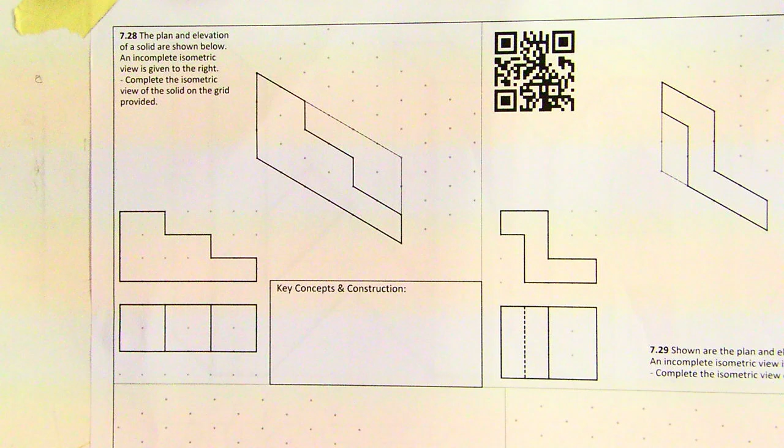So in this topic now, we're going to introduce the isometric view. So in the oblique view, we drew basically the elevation, and then we brought all our lines back at 45 degrees, and the distance they went back was the depth that we got in our plan.

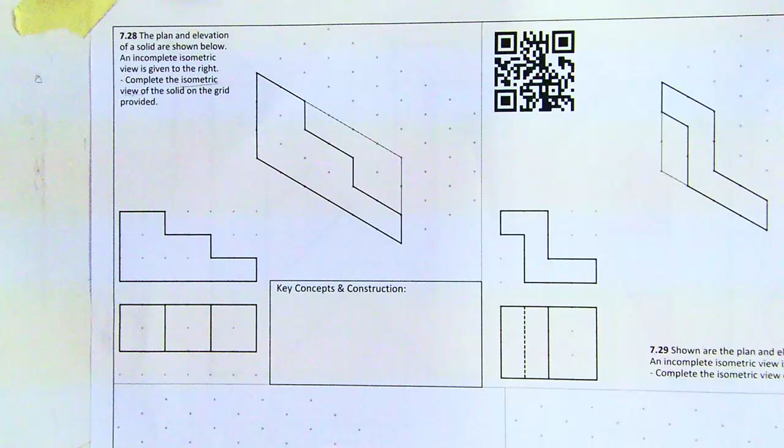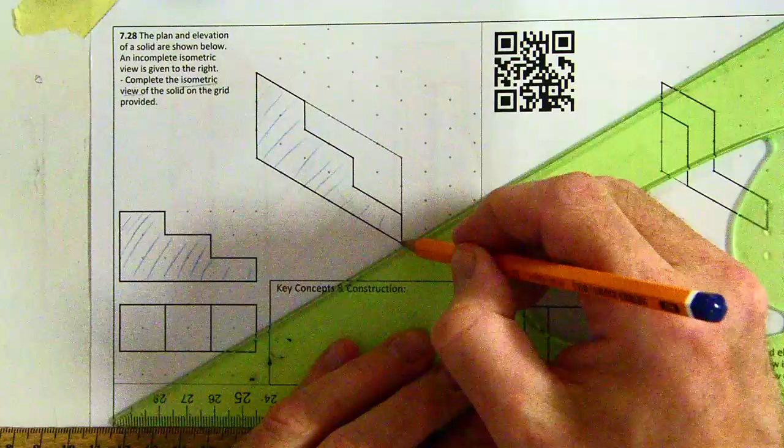With isometric, we're going to draw the elevation, but it's going to be here, all right? So it's going to be at an angle of 30 degrees. So you can see that this is going back like that there at 30 degrees. Our plan then, instead of going back at 45 degrees, is going to go back at 30 degrees. And the depth that's going to go back is the depth of the plan.

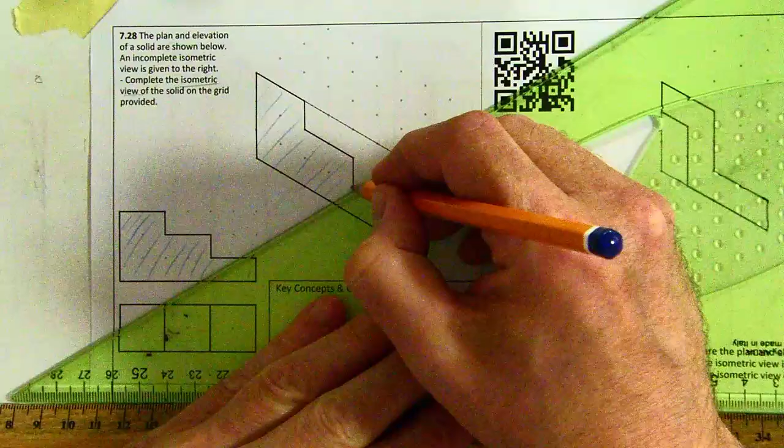All right? So the plan is 2 squares wide, so back 2. All right? Same with all the points. We're drawing our elevation here at 30 degrees, and then we're just bringing back all our lines back at 30 degrees. You can bring these all back. And the distance they're going to go back, all right, now this is nice and easy for these simple ones. So you can see that distance there is the distance they're going back.

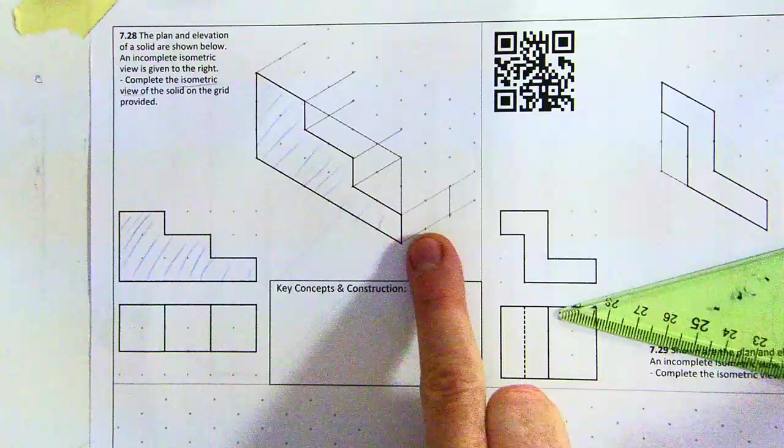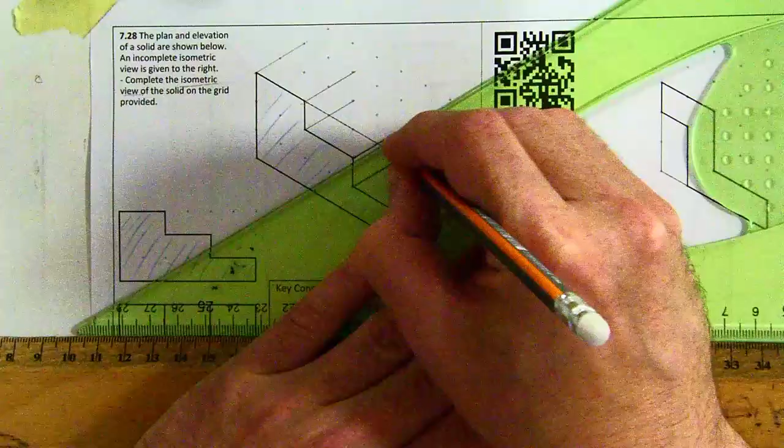Okay, well, 2 squares. All right, now this is a nice and easy one. All the depths are the same. They're going to get a wee bit more difficult. But once you've drawn those lines back too, you can get your HB pencil now, nice and sharp, and go over these here. Nice and heavy. What I try and do is do all the same lines at the same time. That'll speed you up a little bit. That's your completed isometric view now of those steps.

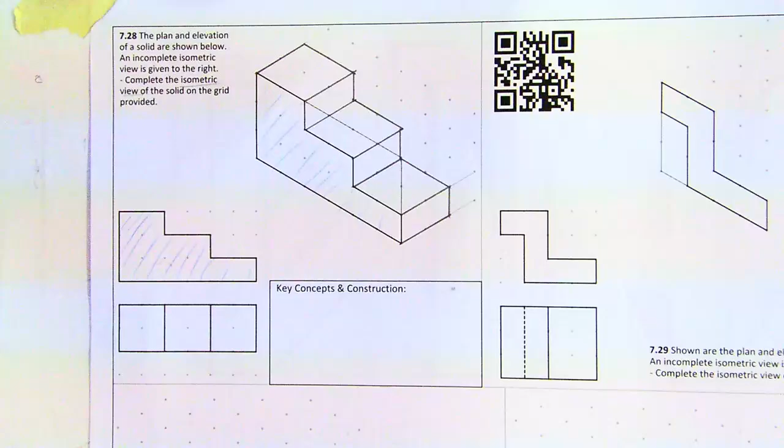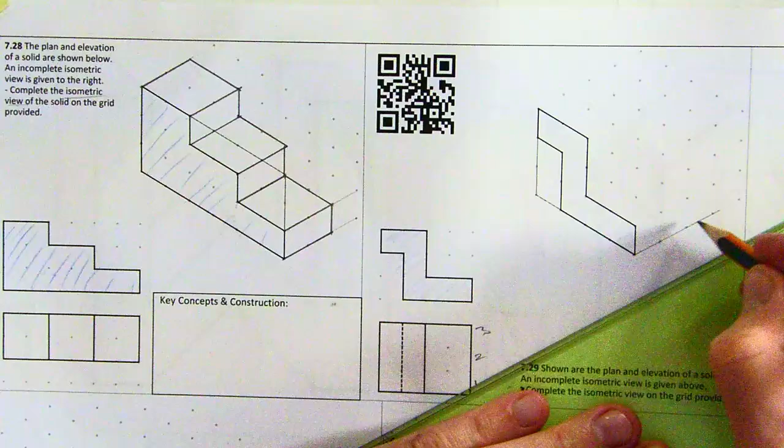So this one here again, we've got our elevation. Here it is here. And we're going to bring all these lines back now, nice and lightly, at 30 degrees. How far back do they come? It tells us here 1, 2, 3 blocks back. So 1 block, 2 block, 3 blocks. Okay. Draw everything in nice and lightly first.

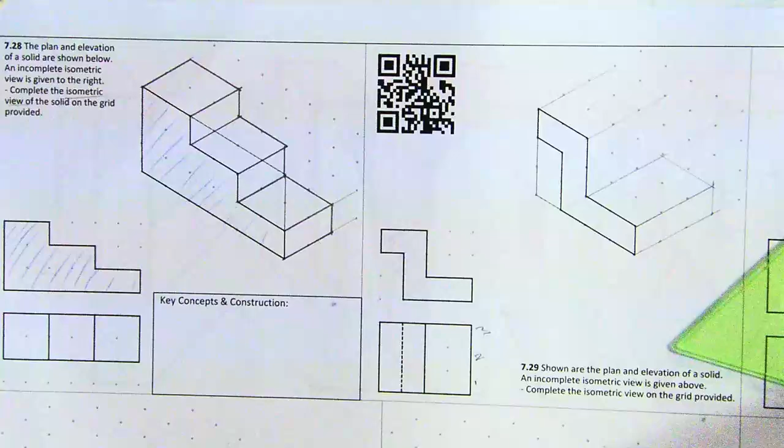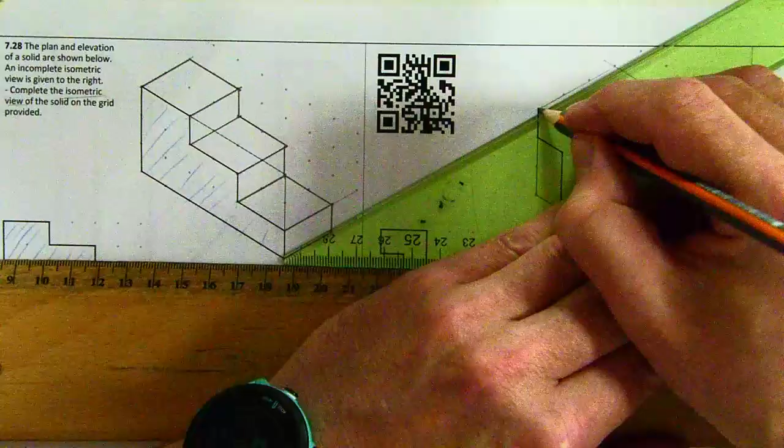Now, obviously in the exam you won't be given the blocks as such. You'll have to measure this back, whatever distance it is, 30 with your compass. Once then you've drawn it like that there, then you can go around it heavy. And again, just to speed things up, maybe try and get all these lines here drawn first. That's your completed isometric view of that.

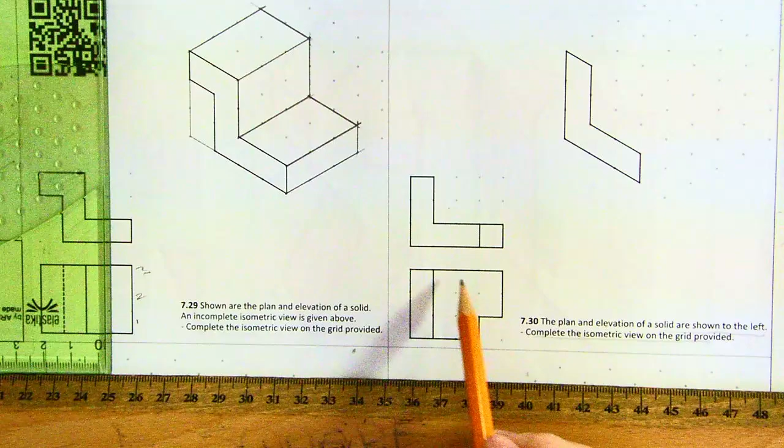So again, the plan and elevation of a solid are shown to the left. Complete the isometric. Remember, our elevation, a plan is always directly beneath our elevation. Now, this one's a wee bit trickier because all the depths are not exactly the same. All right? And what's going to happen here is this is going to go back 1. And then it's going to come out 1 like this. And then it's going to go back 2. So again, all nice and lightly.

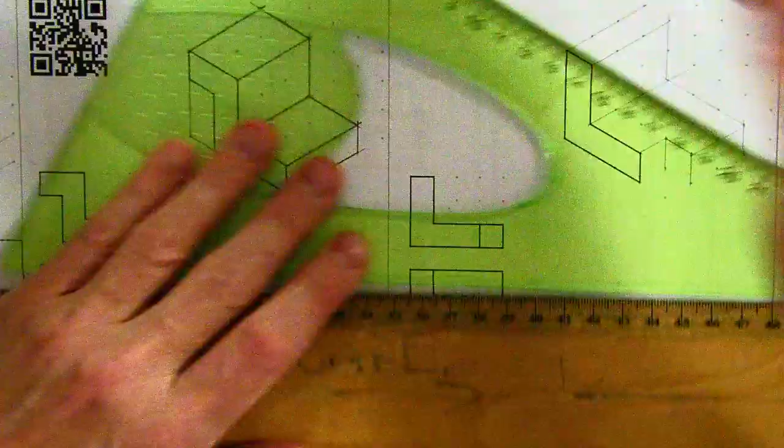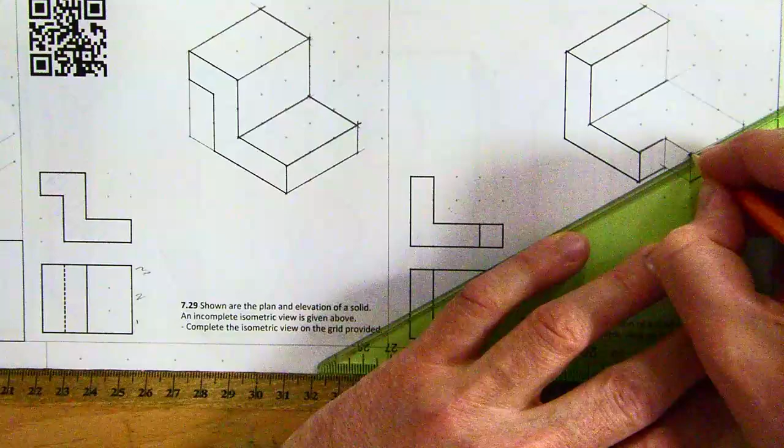Then once we're happy then, this is the little gap here. We can then get our HB pencil and we will go over heavy. Don't worry about the construction lines, you can leave those in. And then that there will complete your isometric view of that shape.

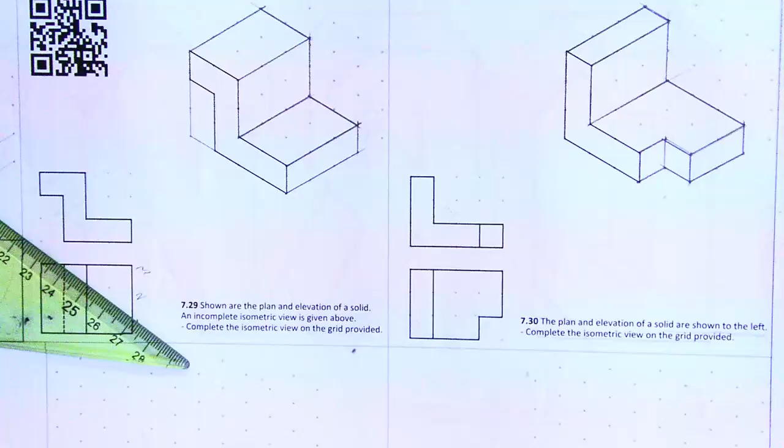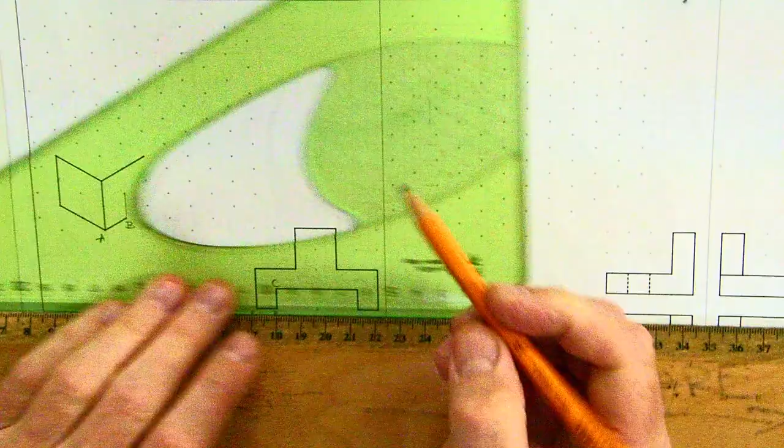So the plan and elevation of the solid are shown, and then complete isometric view. So we want to draw this view here. We can see if we call this A, this is A here, this is B, and we can see we go up one square to find C. So we're going to go up one square there to find C. And then we'll go 1, 2, 3, 4 blocks. Find D. You wouldn't have to index these or name these.

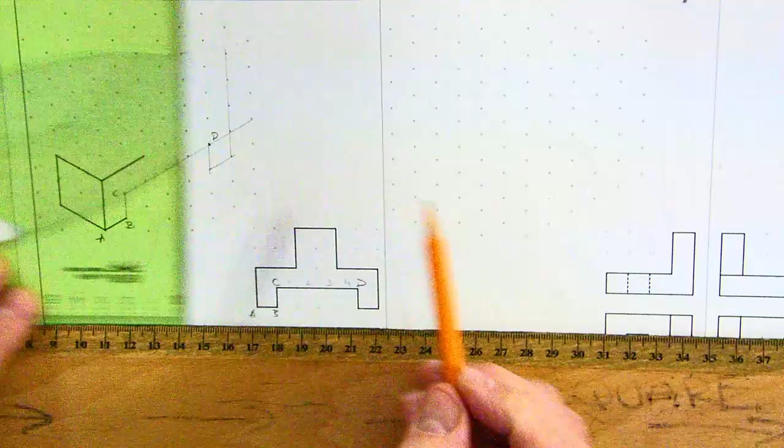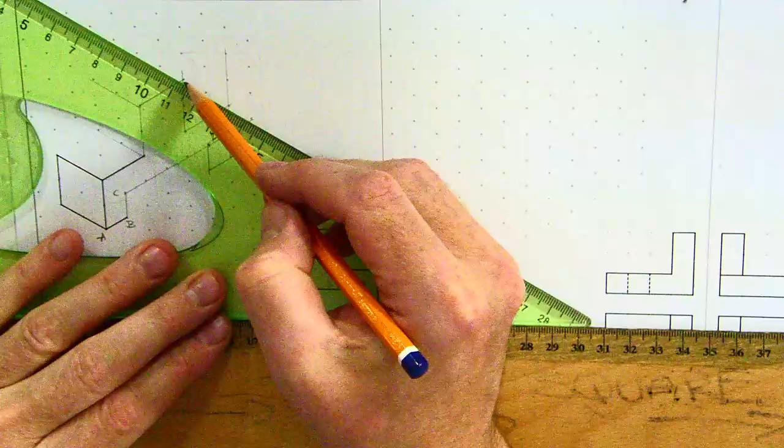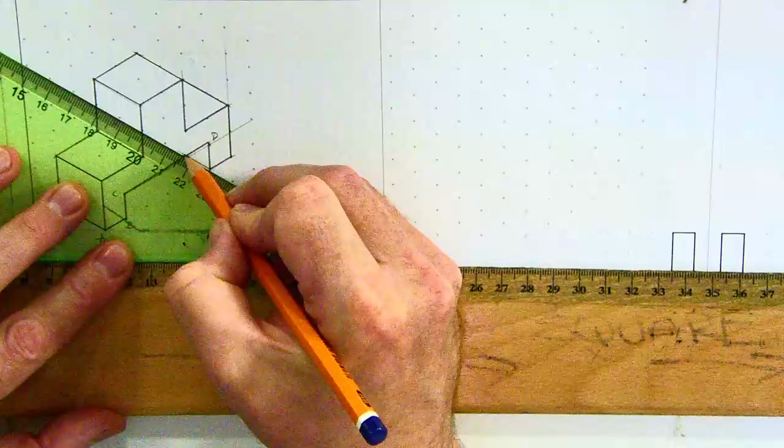And then that's going to join up with this one here. And this is going up 2, 1, 2. So now we've drawn basically our elevation is here. And then we're going to bring these lines back. A depth of 2 because that's coming from our plan. We're coming back here 2. Don't forget there'll be a little one out here as well. As before, once you've drawn that in and you're happy with how it looks, you can go back over it now nice and heavy. That's what you'll end up with there then.

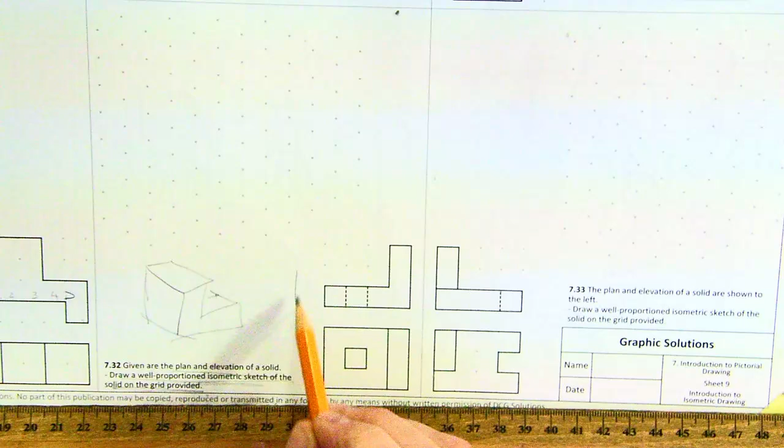This one again, we're given the plan and elevation of the solid. Draw a well-proportioned isometric sketch of the solid. Now, when we go to do this one, we don't maybe want to go and draw it like this. Okay, because this here is kind of blocking out our view. We're going to want to draw it more like this. So we can see as much of the actual shape as we can. So pick any point up here in the corner. One right at the end here.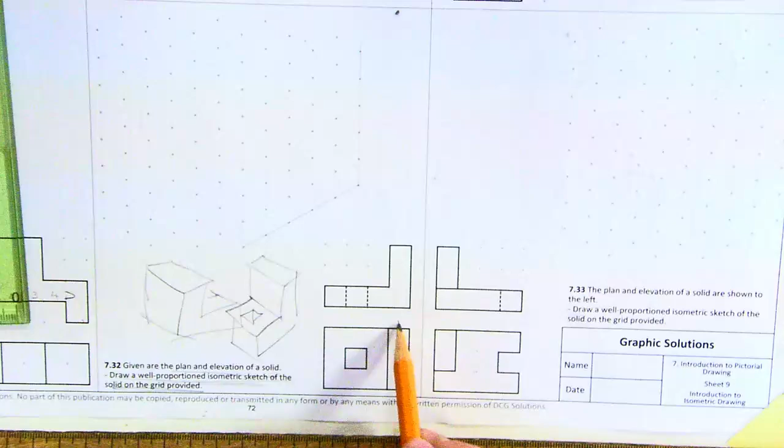And we can see here, it's 1, 2, 3, 4 blocks. It's 1 block high. And then it's 1, 2, 3 blocks high. And then it is 1, 2, 3 blocks wide. And then we've got this little square in here, just right in the dead center of it. And there'll be a little detail in there just to show that in as well.

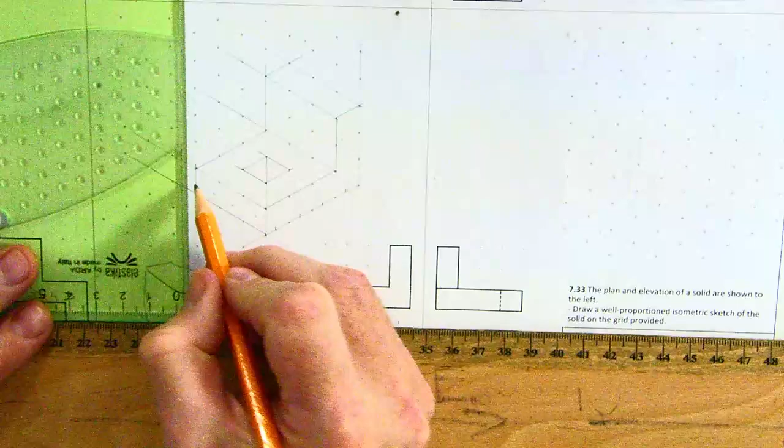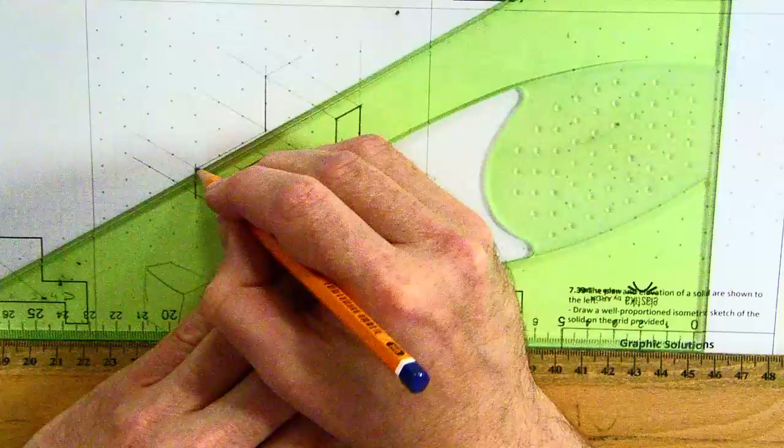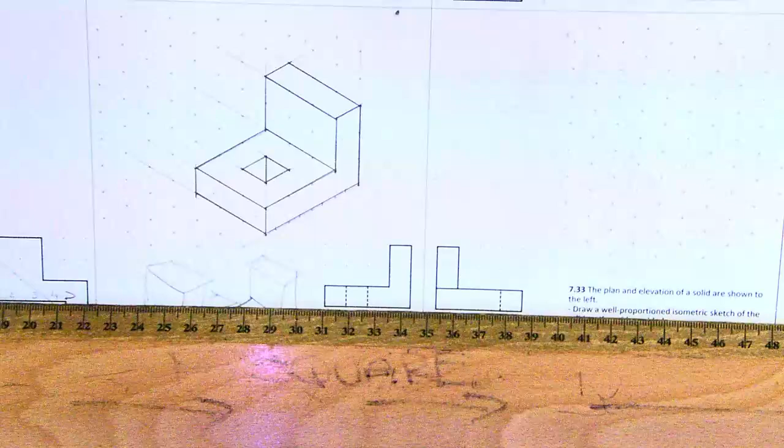Okay, once you've got that done and you're happy with the shape, you can start going around it now heavy. That's your completed isometric view, and you're getting a nice view of it, unlike this one, which you mightn't see as much detail in that one there.

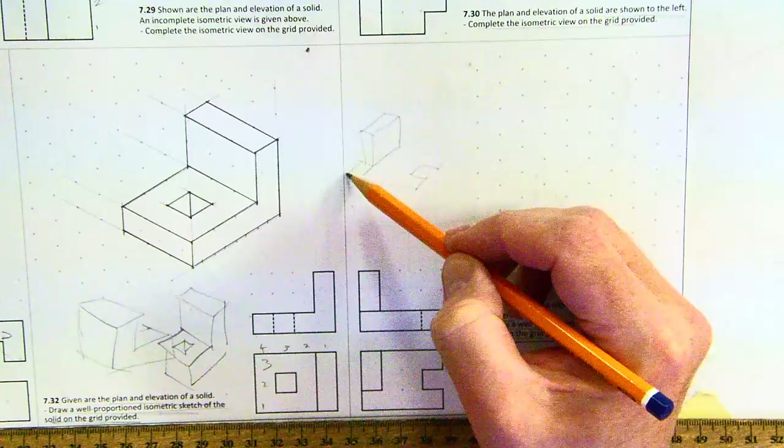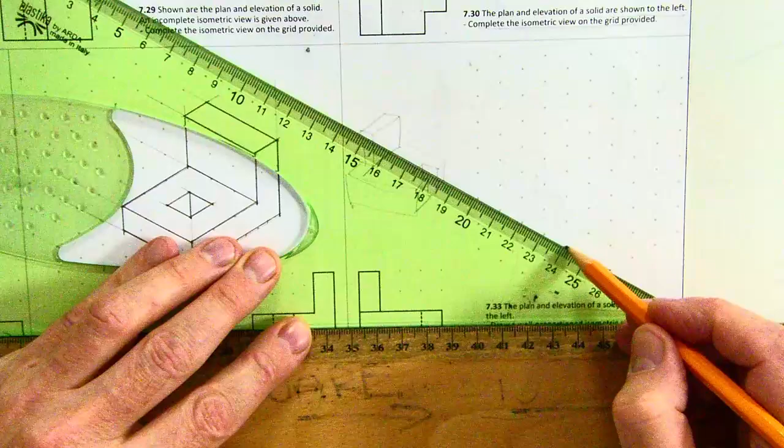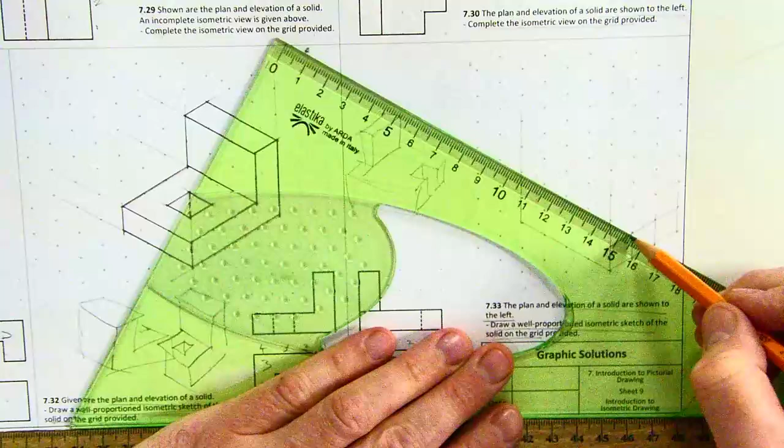So again, the plan and elevation of the solid is shown. Draw a well-proportioned isometric view of the solid. I might draw it this way, so we get as much of it in as possible. Okay. So 1, 2, 3, 4. And then there's 1, 2, 3 back. 1, 2, 3, 4. Start on nice and light first.

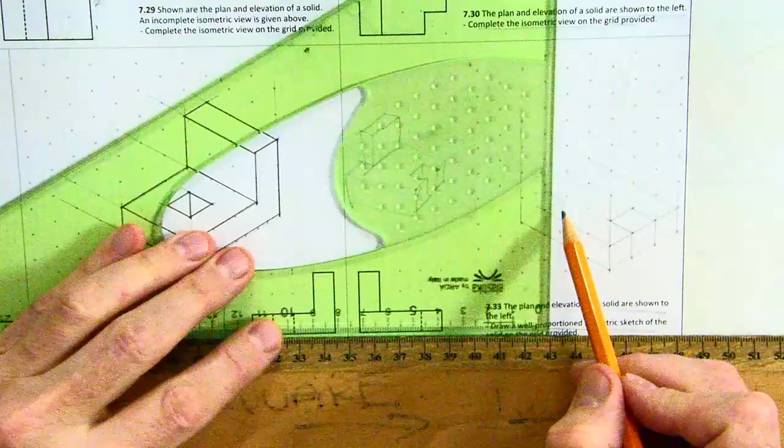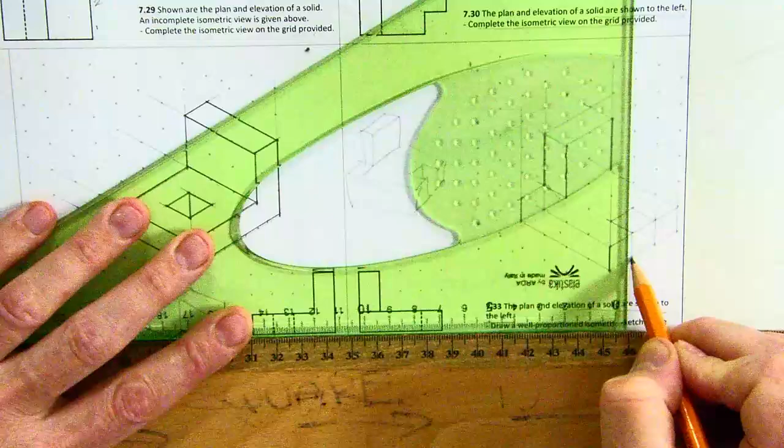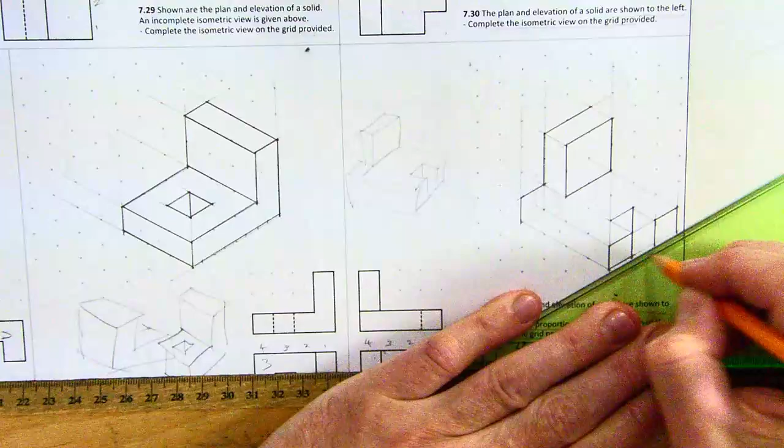Back 1, 1, 2, 3 blocks. Yeah. Two high and two wide. Right, once you've got that done now, start going over heavy. That's your completed then isometric view of that object.